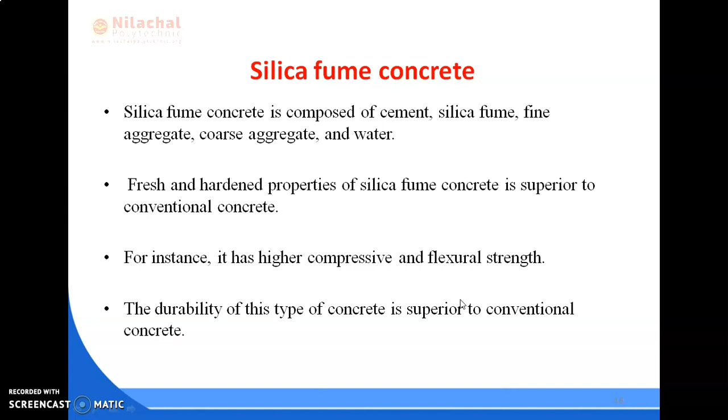Next, some advantages and disadvantages. Advantages: it enhances the properties of fresh and hardened concrete. It reduces segregation and bleeding of fresh concrete. It has high durability. The finishing process is efficient due to low bleeding. As for disadvantages, there is an availability issue, and also high cost.

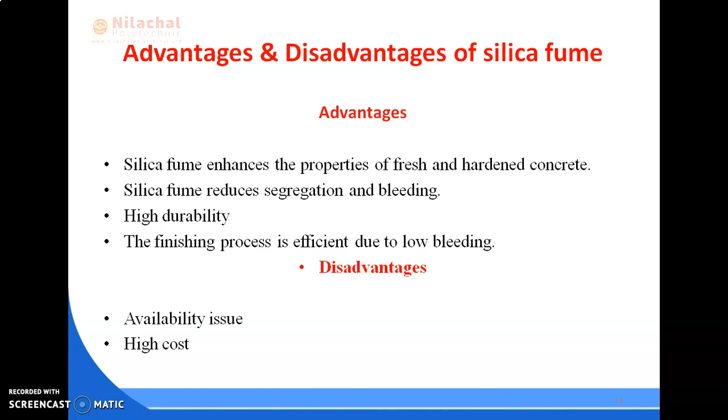Next is application. It has different applications. We can use it in high-rise buildings, parking structures, dam structures, nuclear waste storage facilities, shotcrete rehabilitation, etc.

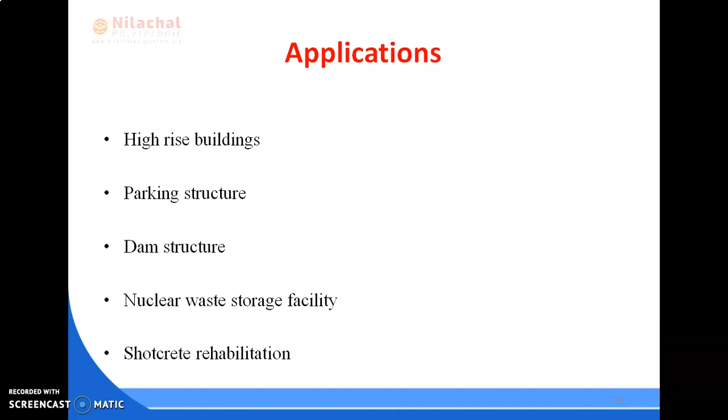Another important thing is guniting. What is guniting? We can also say shotcrete. Guniting is a technique that consists of pumping mortar or concrete at a high velocity through a hose or spray gun to apply on the surface. The guniting process is also known as dry shotcreting. It is a process of spraying a mix of mortar or concrete at high pressure onto the surface with the help of a spray gun.

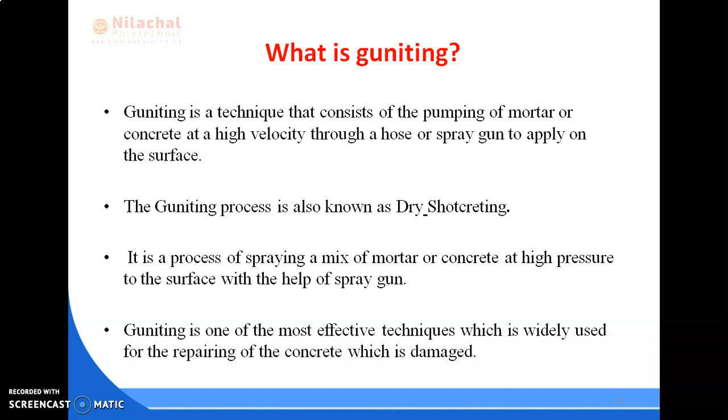Guniting is one of the most effective techniques, widely used for repairing damaged concrete. The guniting process is also used in slope stabilization, construction of retaining walls, water tanks, pools, dams, etc. Some advantages of guniting are that it is economical compared to other methods, and the dry mix can be prepared quickly compared to the wet shotcreting mix.

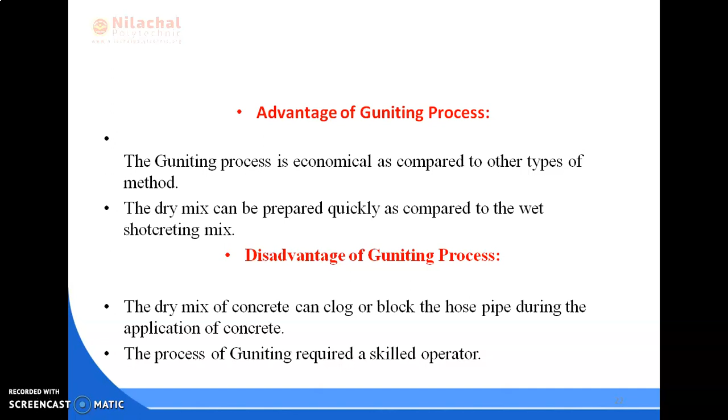Disadvantages: the dry mix of concrete can clog or block the hose pipe during application, and the guniting process requires a skilled operator. Also, the quality of the work depends upon the operator, and in this method there may be chances of wastage of concrete. These are some main disadvantages of this process.

Next is shotcrete. I already told you guniting can also be called dry shotcrete. So what is shotcrete? The term itself says it is a technique in which concrete is shot out through a hose, sprayed on the surface at high velocity, and it is used with both wet mix and dry mix. This process is done with a special unit which consists of a mortar gun. The dry mix of cement, sand and aggregate is prepared in the appropriate proportion. Different types of shotcreting techniques or machines are available which help to control the complete process and make it easy.

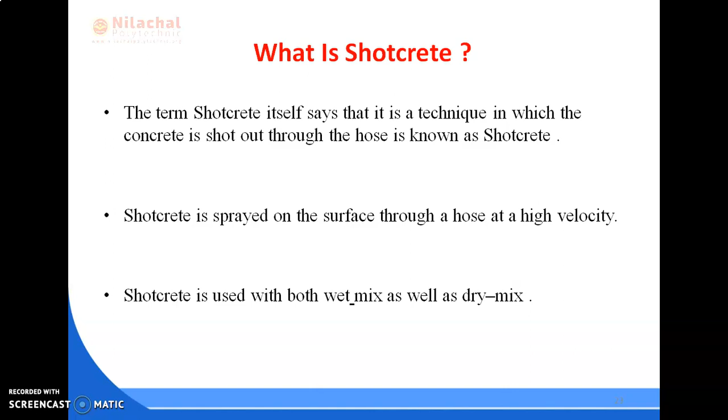Some advantages: it forms a strong and uniform layer of concrete on the surface, this process is more economical compared to conventional concrete, and it is suitable for construction where formwork cannot be installed. Disadvantages: there may be chances of developing cracks if more water is added to the pre-mixed concrete. Also, shotcreting is a little bit expensive compared with the guniting process.

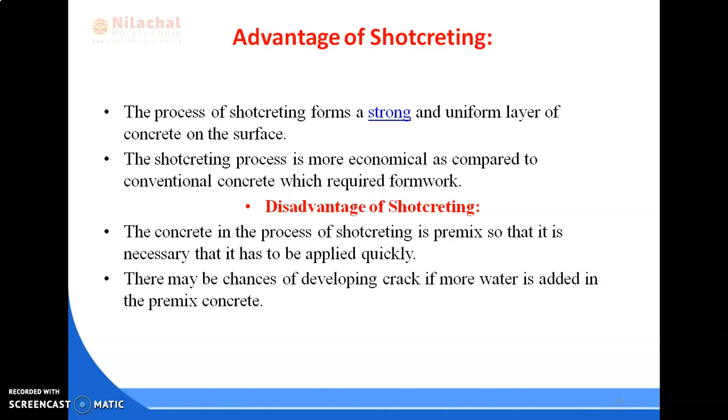Next, the difference between shotcrete and guniting. Shotcreting is a technique of spraying concrete on the surface at high pressure. Guniting is a technique of spraying a mix of mortar or concrete at high velocity. The shotcrete process can be done with both dry mix and wet mix, but the guniting process uses only dry mix, so it is also known as dry shotcreting.

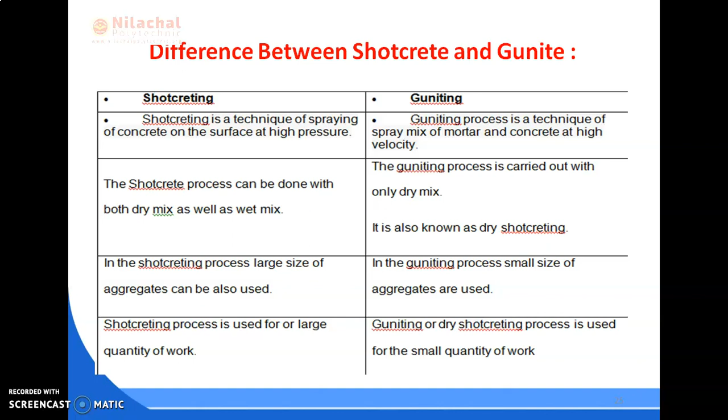In the shotcreting process we can also use large size aggregates, but for guniting we prefer small size aggregate. Shotcreting is used for large quantities of work, while guniting is used for small quantities of work. These are some major differences between guniting and shotcreting. With this, chapter 11 is completed, and in the next lecture we will start a new chapter.